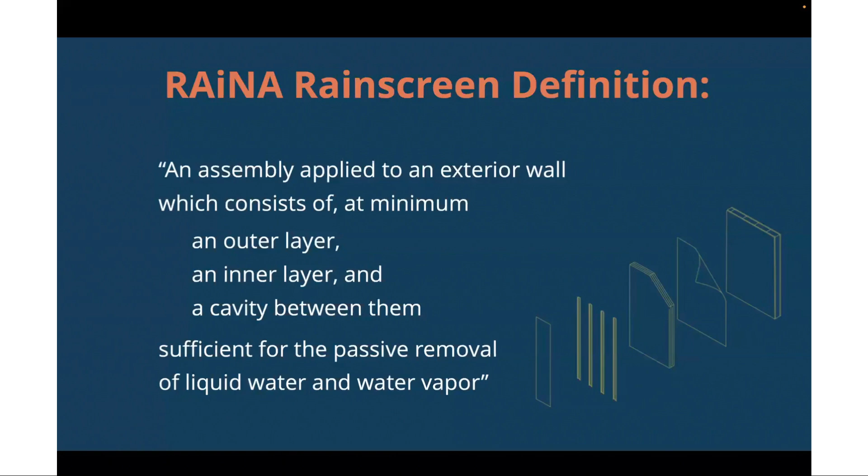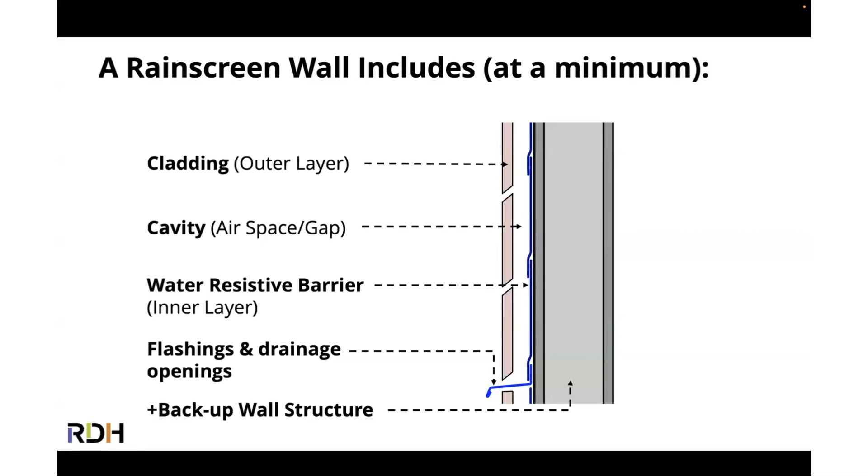Typically, this is what people would look at as a wall system: a Rainscreen wall would have that cladding as the outer layer, the airspace or gap or cavity behind the cladding, then there is a water resistive barrier, which would be the inner layer in this definition. Something that isn't always there, but in practice is almost always, is that you need flashings. You certainly need drainage openings. And this is all supported by a backup wall structure, whether that's cast in place concrete or wood studs or anything in between. So those are the basic minimum functional requirements.

But in a modern day, we also have insulation, particularly an increasing amount of insulation that's located outside of the structure to minimize thermal bridging.

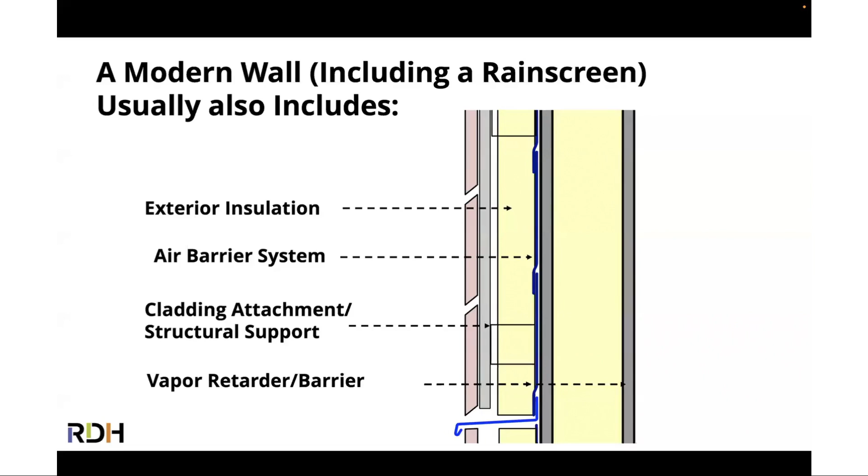We also have to worry about things like cladding attachment systems. This is a huge deal in terms of doing rain screens, a practical issue. And we also have an air barrier system here. For a rain screen as written, you don't need an air barrier, but we know for a modern wall, we need an air barrier and we need insulation. So that's why we're showing this as a more complete description.

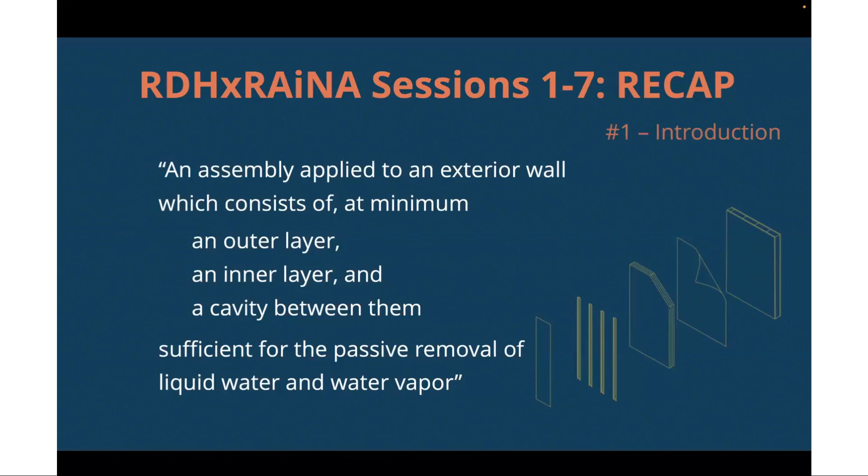Now, we have made this 8 sessions because we thought through the definition and thought, what pieces could we break down? So first, number one, Finch did an introduction: what are rain screens? Why do we use them? What are they good for?

Then I presented some of the history and its development, and it's actually quite significant how Europe, Japan, North America, and New Zealand went down different paths, and there remains confusion between these different parts of the world because of that different history and the different words and definitions.

But we started getting into the cavity, the parts of the rain screen wall, and focused on liquid water removal. So that means drainage, a whole one hour session on that. Then we looked at the passive removal of water vapor, where we can dry things out and make sure that condensation can be forestalled, and we do that by ventilation, which also needs a cavity. So that was a whole session, number 4.

Then we talked about the last line of defense in the Canadian Building Code, which is the water resistive barrier in the American building codes. So that was session number 5, all of the options and details.

Number 6 was cladding attachments, practically needed, but not here in this definition. Number 7 was the cladding itself, which is the first line of defense in the Canadian Building Code, and the thing that actually is usually the most expensive part of the entire enclosure. Even though people spend a lot of time trying to save money on insulation and WRBs, by far the most expensive thing is the cladding.

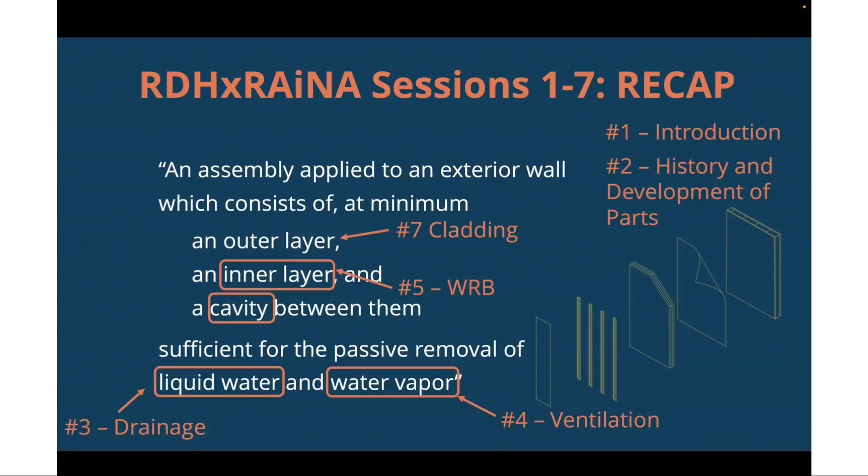Now, today, also not listed on this, we're going to talk about pressure equalization. So pressure equalization is not a fundamental requirement, meaning you don't have to have pressure equalization for a modern rain screen wall assembly to work.

Historically, we added pressure equalization as a feature or a component to essentially already functional rain screen systems that already had a cladding, a gap, a water resistive barrier, and flashings, and those are the walls that we added pressure equalization to. It's important to recognize that distinction, because sometimes the conversation about what it takes to make pressure equalization work doesn't remind you that you really need a water resistive barrier and flashings. And I'm reminding you of that, and you need to remind yourself of that.

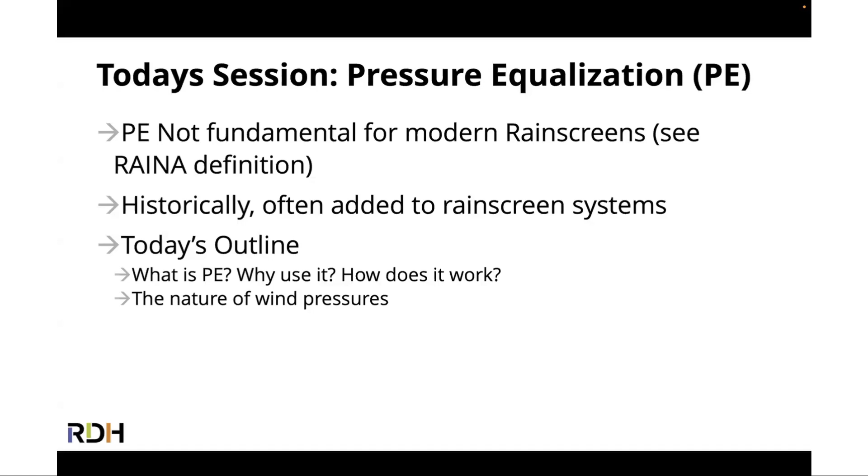So today I'm going to go through what is pressure equalization, how does it work, why would we use it, and then I'm going to dive into the nature of wind pressures, which is going to lead us into some interesting conclusions and observations. So let's talk about pressure equalized wall systems.

The intention behind pressure equalization, whether it applies to a joint between precast concrete panels, a window to sash joint, or a whole wall cladding, is that it's encouraging the equalization of the exterior wind pressure with the air pressure behind the cladding.

The image on the right-hand side is from one of the first guides presented in 1971 by AAMA, focused on curtain wall design. The basic idea was that if you just had a single layer that was your cladding and your water control, wind pressure would blow air up and over any cracks, joints, and openings.

So the concept shown in drawing C was to acknowledge that the cladding was not perfectly watertight, and therefore water was going to be blown through a hole. So they recommended complex joint details to resist the direct flow of water droplets, using labyrinths, gaps, and nice overlaps, but also to ensure an airtight wall so that wind would not blow through unintentional openings, dragging water with it.

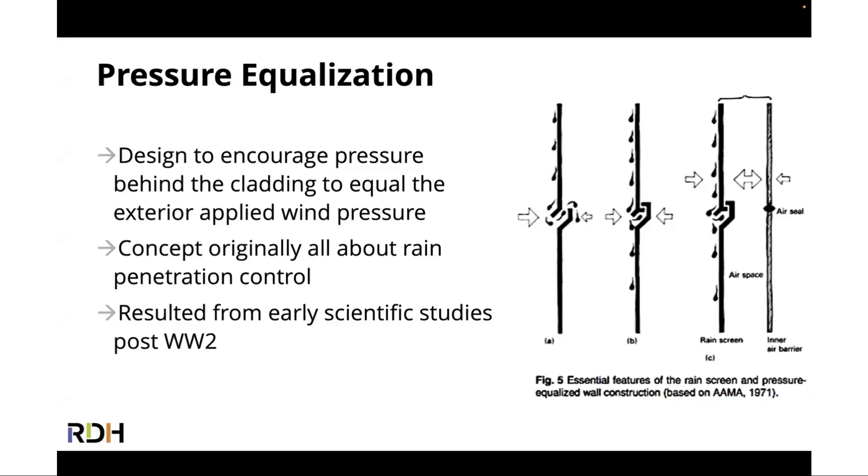And I think everyone understands gravity, right? You shouldn't tuck your pants into your boots, as I described. That actually remains, in my professional experience, the most common cause of water leakage in buildings. It is unintended inward sloping, or cracks and openings that slope inward, that bring water in.

Surface tension allows water to cling to surfaces, and that water running under the force of gravity can then, if the surface bends inward, drive water into your assembly. Again, pretty easy to design that problem out, but it occurs accidentally in many practical situations.

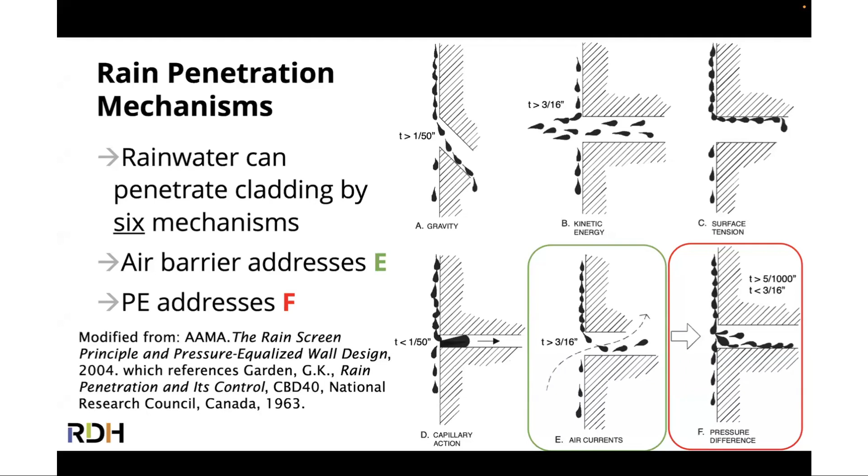Over a certain size of gap, a film of water can form, and when there is a higher pressure outdoors than behind the cladding, water could be pushed into the wall cavity or even further, depending on how the wall is designed. So again, the pressure equalization as a concept was being promoted, although not widely used, by the 1960s.

These are some old drawings. That's the reason that their clarity is so poor. And it was defining the cladding as a rain screen just to reinforce the fact that the cladding wasn't stopping water. So a rain screen cladding is really a cladding that leaks rainwater.

That's not hard to do. The hard part is the rest of that rain screen. Now, you can see here, by today's definitions, none of these walls would be seen as actually reasonable as a choice. So, for example, in the brick veneer over the wood framing on the far right, it shows the sheathing paper as an air barrier, not as a water control layer, not a water resistive barrier.

And you'll notice the flashing does not tuck behind the sheathing paper. And this is because they hadn't yet recognized how important drainage was, and hence how important weep holes and flashings were. And so they were really pushing the idea that these weep holes were ventilating openings, and that the sheathing paper, the WRB, was an air barrier, and that was the way to get good rainwater control.

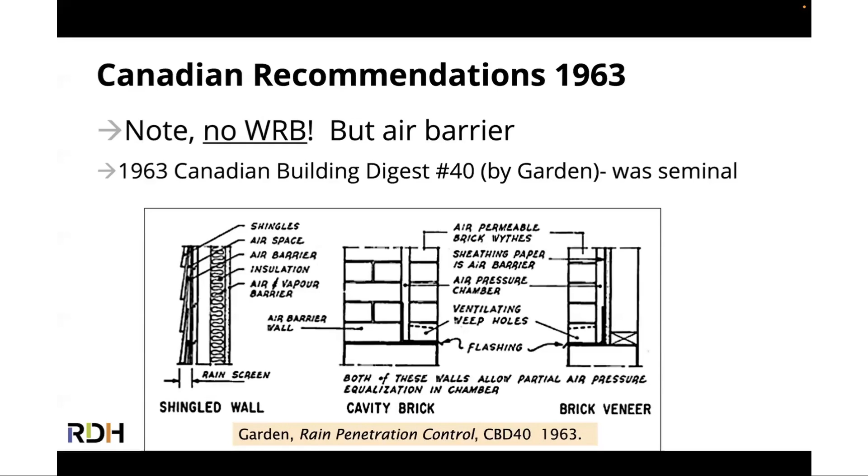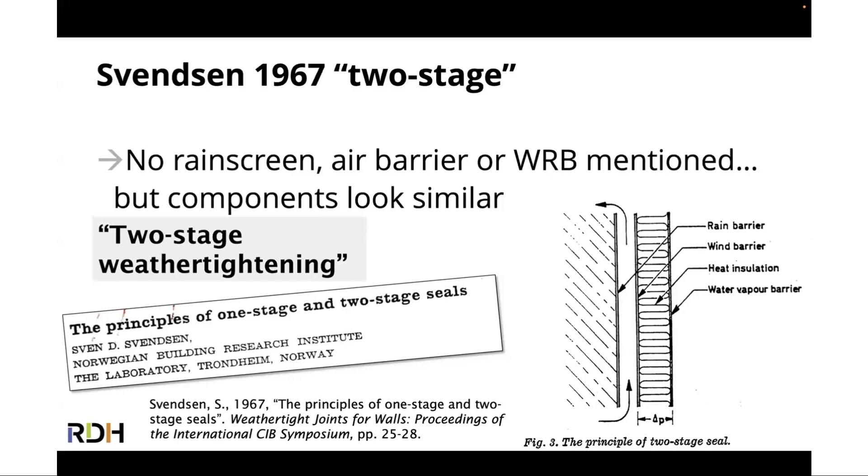So this is another image from another very important document, Garden 63, Svendsen 67, very important seminal documents that started us down this road. But we didn't really have an air barrier as a language or a water resistive barrier. We didn't really have that clearly stated, as I would say we have in the last 20 years.

So this slide is just reminding you of what I said. Air barriers were not standard. Water resistive barriers were not a thing. But today, when we interpret how we should move forward, we have to recognize that rain screen walls, what we talked about in the previous 7 sessions, absolutely have a water resistive barrier that is water resistive.

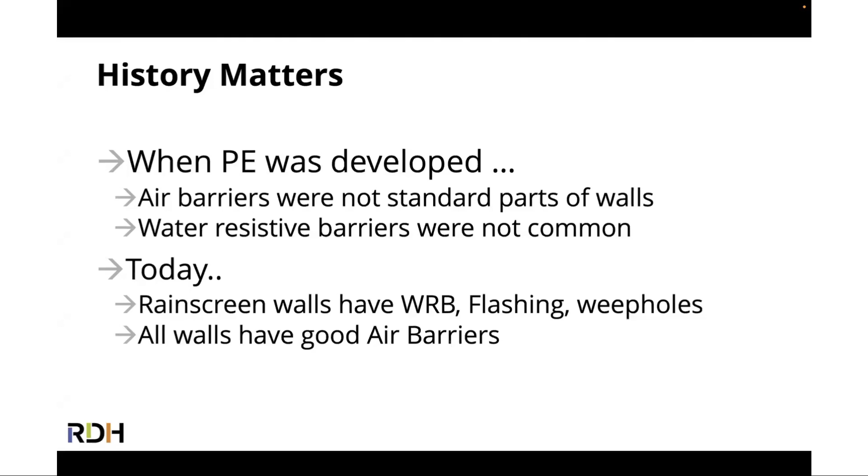It's integrated properly with flashings, which connect to weep holes to get the water to the outside. That's rain screens. Also, modern walls have great air barriers. We're increasingly testing our buildings to make sure that our air barriers are good. So those things are now inherently part of accepted minimum practice, not even best practice.

So pressure equalization adds a component to this. It says we want to manage air pressures across the rain screen, across the cladding, to reduce the amount of water that will pass because of air pressure differences. Remember, all the water leakage that previously occurs with no air pressure differences still occurs. Pressure equalization deals with that wind pressure difference as a force.

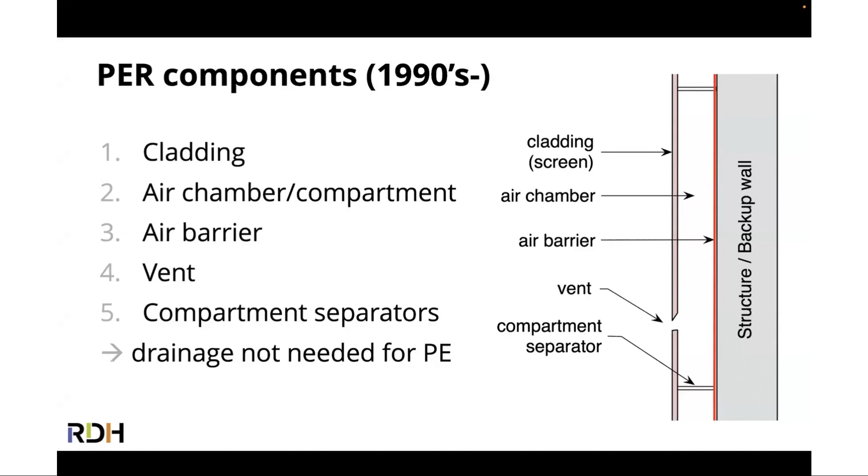So the 5 components identified back in the 90s were a cladding, an air chamber - it's no longer just a gap, because it has these compartment separators, which we'll come to at the end of this session, about limiting the spatial size of the air gap. There's an air barrier and there's a vent. I intentionally didn't show you a water barrier, flashings, integrated, because that's not what pressure equalization is about. That's what rain screens are about. But a pressure equalized rain screen pushes all these things together to get the best in performance.

So the theory here is that we're looking at the bottom of a wall. The blue line is your air barrier. The wind pressure is rising or falling or blowing hard on the left-hand side. And that's the green box to say that when the wind blows on the outside, it enters via the vents into this chamber. And so now the pressure on the inside is the same as the outside.

Ergo, no pressure across the cladding. And that means that if there was a crack or opening across the cladding that would have allowed air pressure differences to push water in, then it would no longer work. So it would not drive water anymore. If you have a downward sloping crack, however, gravity will still drive the water in.

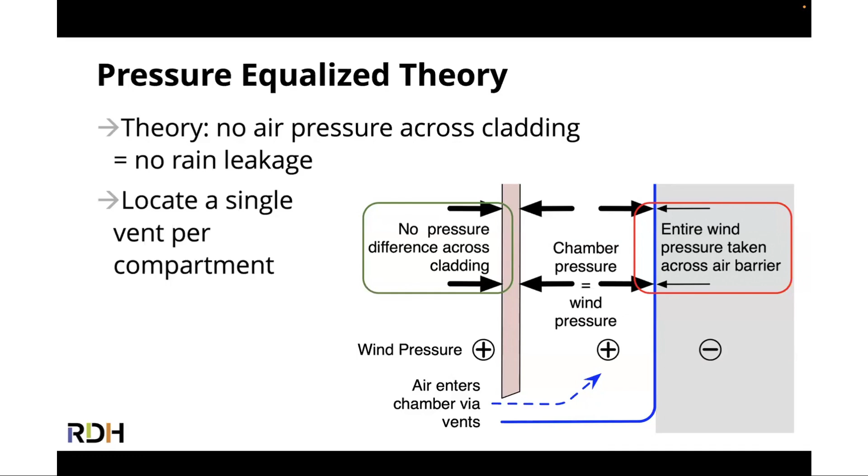So this is all about solving this air pressure difference. Let's start with thinking about pressure equalization in a static sense, and then we'll talk about dynamic, and then I'll talk about spatial dynamics.

So static pressure equalization is thinking about the wind as a constant, steady pressure. And by steady, I mean steady over 10 or 30 seconds or something. So you apply a pressure. Let's say it's 20-mile-per-hour wind hitting the face of your cladding.

That turns into a pressure of some 100 and some pascals, or I don't know, a quarter-inch water column, something like this. That uniform pressure will easily flow into the chamber and absolutely get close to equalizing across the cladding. The reason I mention it this way is that that's not how the wind is in real life, but it is how we do most water penetration tests. A uniform, steady pressure means that all you need is a good air barrier and even a small vent, and you will get equalization.

Because within 10, 20 seconds, even through a small vent, air will flow from outdoors into the chamber, equalizing the pressure across the cladding. And so if you were to measure the pressure at many spots across your wall system, it would follow the green dashed line on the right-hand side, showing that there's the same pressure on the outside as in the chamber, and it only drops across the air barrier. And that's how we do most on-site tests.

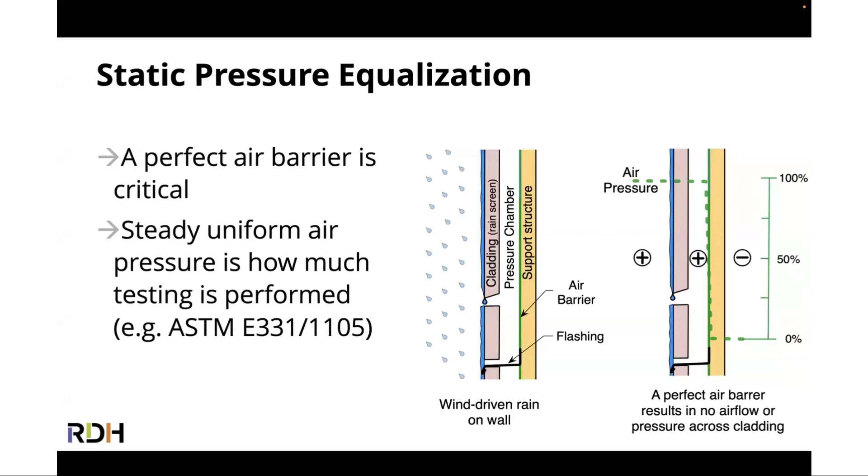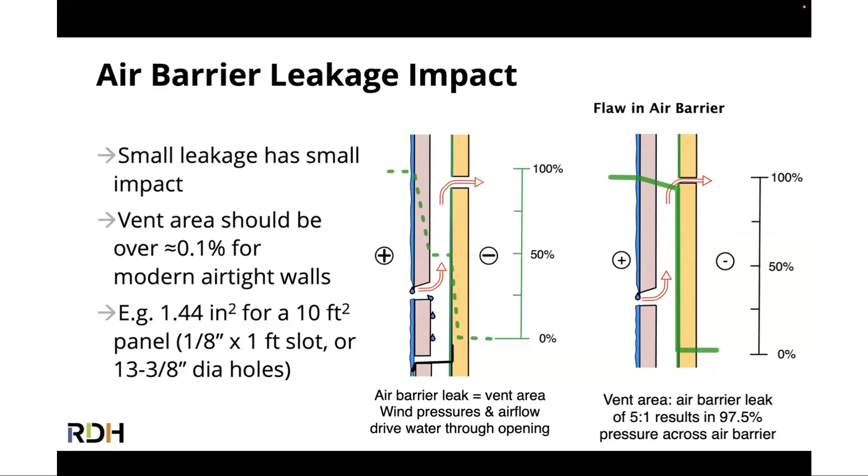Oh no, it's not conservative at all. It's the opposite of conservative. Because those steady uniform pressures are actually easy to pressure equalize. So the moment you have even a modest attempt at venting and air tightness, all systems are pressure equalized. And that's very common, like window tests - we do 15-minute window tests, and as long as you have a reasonable attempt at venting the frame, they're all pressure equalized. But that doesn't mean that they all work that well, as we'll find out in the field.

However, I want to point out that I find it surprising as I look at modern systems - this is an ACM cladding system, and the vent openings for these panels are 5/8 of an inch by 1/8 of an inch. This is barely enough to let water out. And the area is probably well less than 1/10 of what's needed to get close to air pressure equalization at a reasonable level. So this is a bit surprising, but it's not uncommon.

So larger openings, more openings, or even slots are usually easy steps forward to achieve this steady pressure equalization.

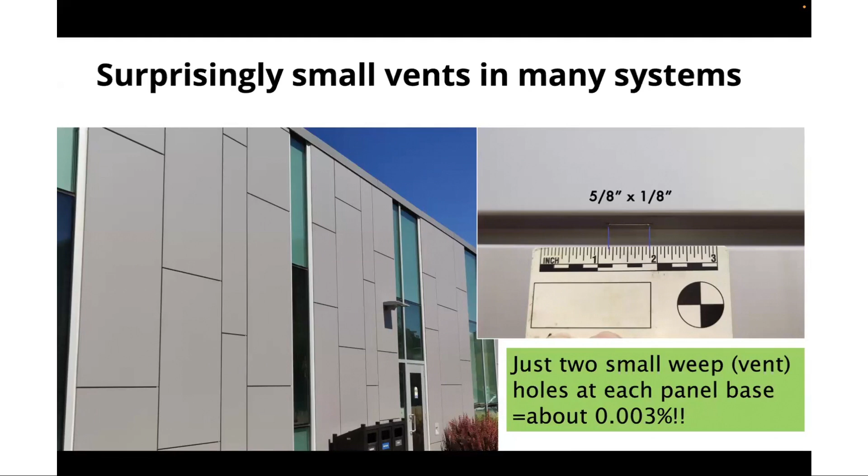So these are highly vented systems - we talked about these in the last session. If you have this many vents in your cladding, you can be pretty darn sure that the air pressure behind the cladding is equal to the air pressure on the outside of the cladding. However, you can also be pretty darn sure that lots of rainwater will directly pass through the cladding. So there's always a little bit of that trade-off.

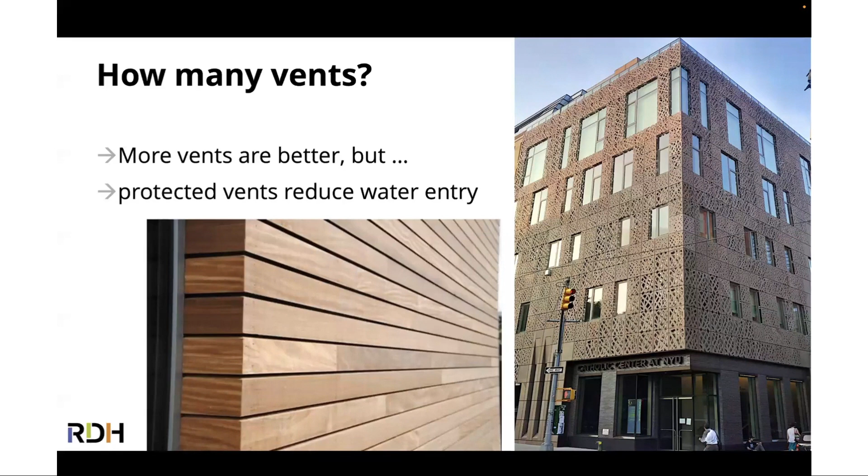The historic pressure equalization rain screens were all about protected vent openings. But that doesn't mean that these systems I'm showing on the screen can't be quite successful. It just means that they are not successful because they're pressure equalized. They're pressure equalized for much of the time, and yet lots and lots of water passes through. So you have to figure out how to manage that high level of water passing through.

So I want the key takeaway from this chunk to be that walls with good air barriers are almost all pressure equalized to static pressures with even modest vent areas. So, reasonable vent areas, good air barriers, and when you do a steady test as per most standards, it's going to work as a pressure equalization.

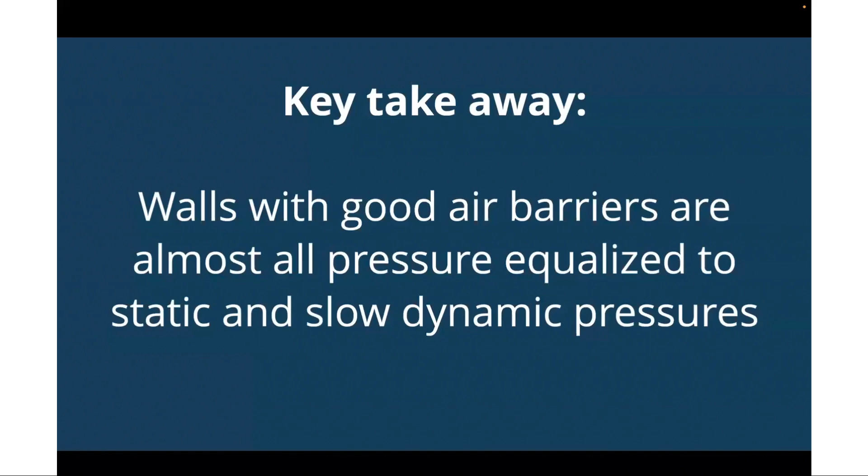So let's get a little deeper into this. First of all, the concept that we're pressure equalizing to manage water penetration through the cladding - you can't forget that water penetration through the cladding is likely to occur anyway. Even at zero air pressure difference across the cladding, there are those other mechanisms, surface tension and gravity being key, that can drag water in. I've shown a crack in this cladding that happens to angle downward, which means that it doesn't matter how pressure equalized you are, water will leak in.

And that's why rainscreen systems say, yes, and I have a cavity, I have a water resistive barrier integrated with flashings and a weep hole, and that leak is not a problem. So that's how we would normally approach a rainscreen wall.

Now, another thing to keep in mind is that leaks that occur not in the cladding itself, but at penetrations like canopy attachments, window and door penetrations, balcony penetrations, routinely have water ending up on the water resistive barrier. You might think that's not a problem, and I agree that water on a water resistive barrier isn't a problem. However, if I have pressure equalized systems, as I show on the right-hand side, now 100% of the wind pressure acting across the enclosure is acting on the water resistive barrier, which now has water on it.

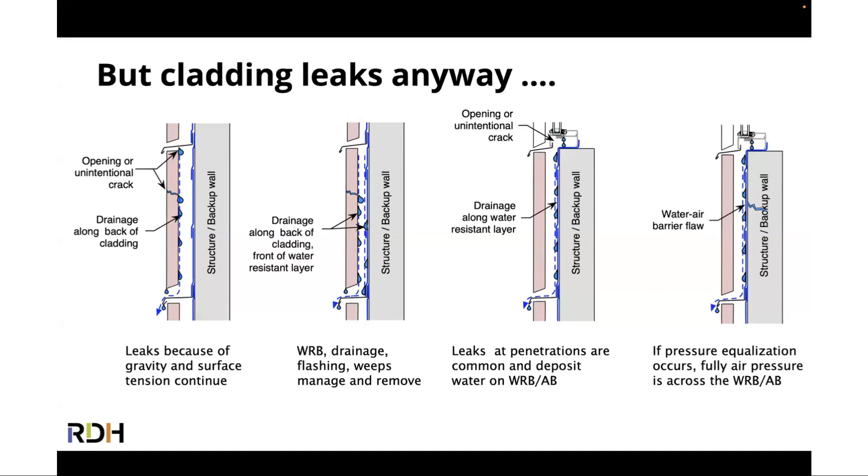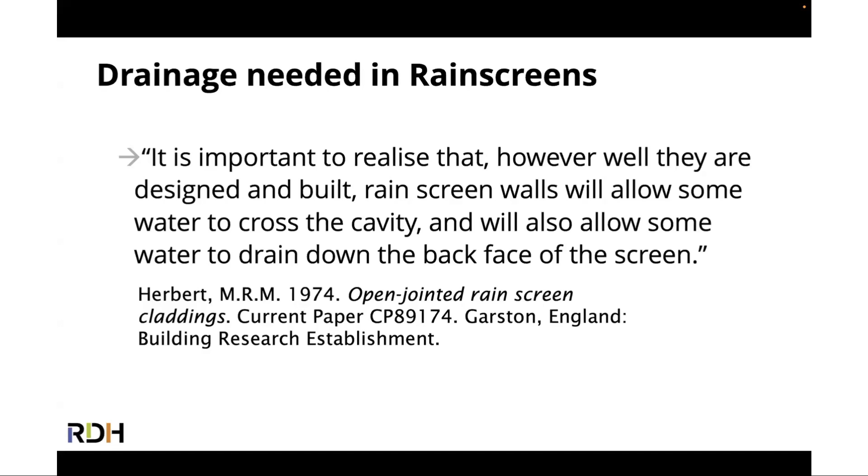I want to say that it was pretty clear within 10 years of Garden's seminal paper on rainscreens that it was understood that rainscreen walls will allow water to cross the cavity and also allow water to drain down the back face of the screen. And clearly, Michael Lacasse, Dr. Lacasse at the National Research Council, did a whole bunch of much more detailed studies in the late 90s that led to the same conclusion, which led to the Canadian Building Code requirement of a second line of defense, aka the water resistant barrier.

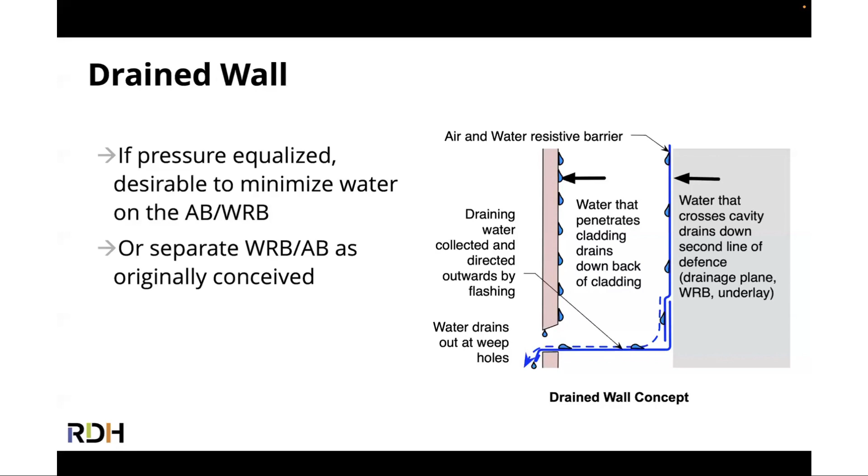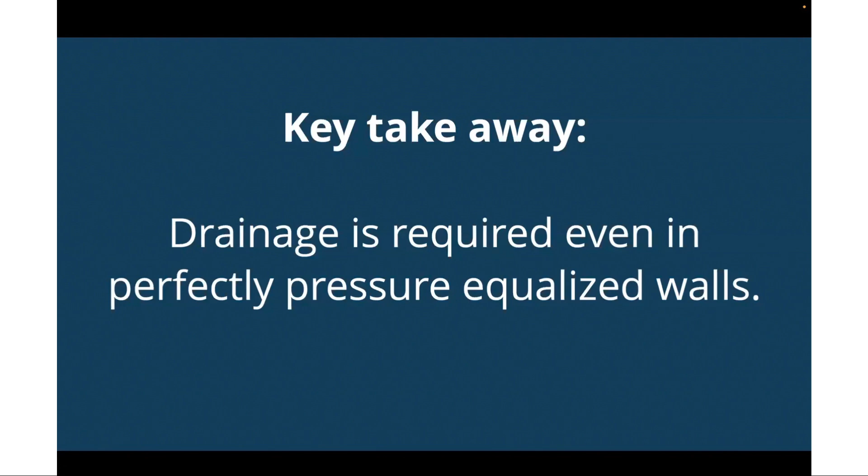So if I have this detail as a drained wall system, a rain screen, pressure equalization helps reduce the amount of water that passes the cladding, but any water that does pass through, I'm ready for it, I can manage it. Pressure equalization is an enhancement that reduces the amount of water across the cladding, but it doesn't change the need for a water resistant barrier, flashings, and weeps. That's why the key thing is drainage is required even in perfect pressure equalized walls, which are hard to find. But even if we did achieve perfect pressure equalization, we would still want drainage to be there.

To understand more, we're going to take a segue into the nature of the wind. This tower here is not a cell phone tower, it's actually a research facility. It's a 200-foot tall tower in the middle of a rural region in Iowa, which means their buildings are spaced every mile apart, and the flat nature of the terrain means you get really good wind conditions here. This is called an atmospheric observatory. It's not just wind speed, they measure all kinds of things as you go up this tower.

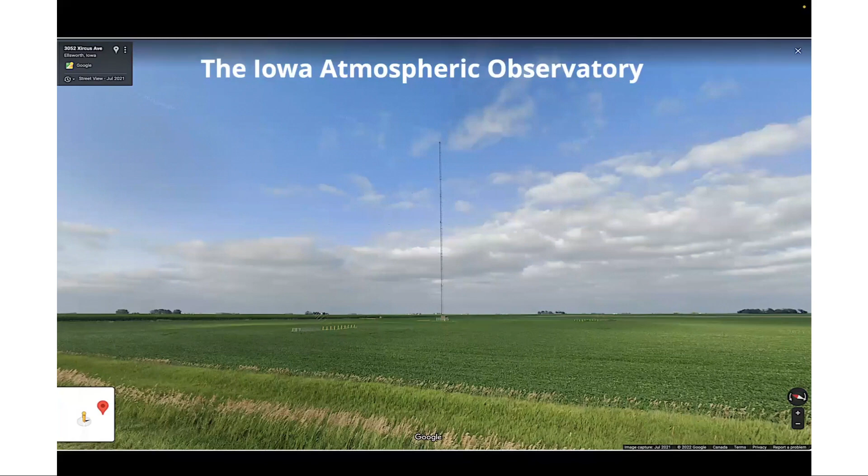I'm going to show you some of the results from wind measurements to give you a feeling of what wind looks like. I chose this day because during that day and time, the wind conditions were seen as extremely high. Tractor trailers were being knocked over on the nearby interstate, that kind of thing. And yet the pressures are actually quite a bit lower than we would normally impose on a normal water penetration test. So just take a look.

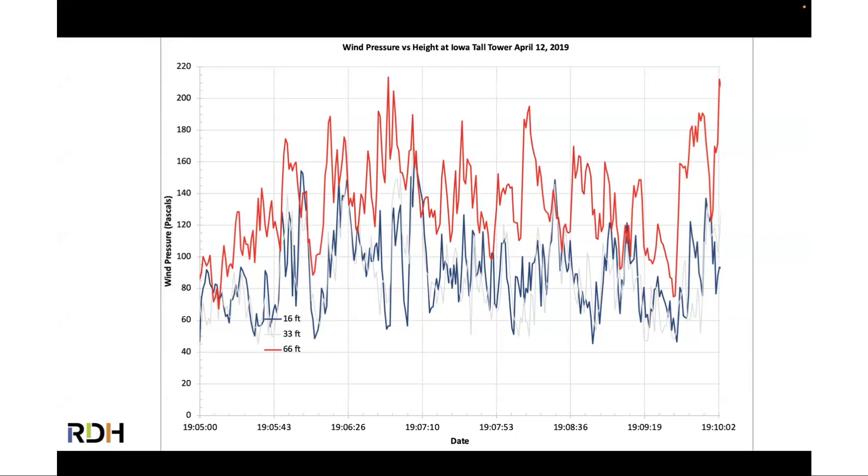There's a few things to notice here. I've got actually 3 traces, this is over approximately 5 minutes and 2 seconds. You'll see that the red line is 66 feet above ground, so what is that, 5 stories up, 6 stories up. The blue line is 16 feet above ground, so that's like 2 stories up. A couple things: one, as you go higher up, the pressures get larger, that's kind of a given. But more important, I want you to notice that over this 5-minute period, pressures vary quite significantly. They vary rapidly, and I haven't even included direction here because it's more stable.

So let's just focus on this wind pressure at 66 feet above ground. We start at 100 pascals, which is about 1/3 of an inch of water column. By the time we get to 7 minutes after 7 p.m., we're up to 200 pascals, which is 3/4 of an inch of water column. Then it drops and rises and drops. The average pressure here is only 138 pascals. That 138 pascals is, by the way, a default value for ASTM E331, which no one uses. Nowadays we typically use a minimum of 300 pascals. But the 5-minute average doesn't actually capture how much the air pressure varies in time. Here's a couple of the gusts I've looked at here.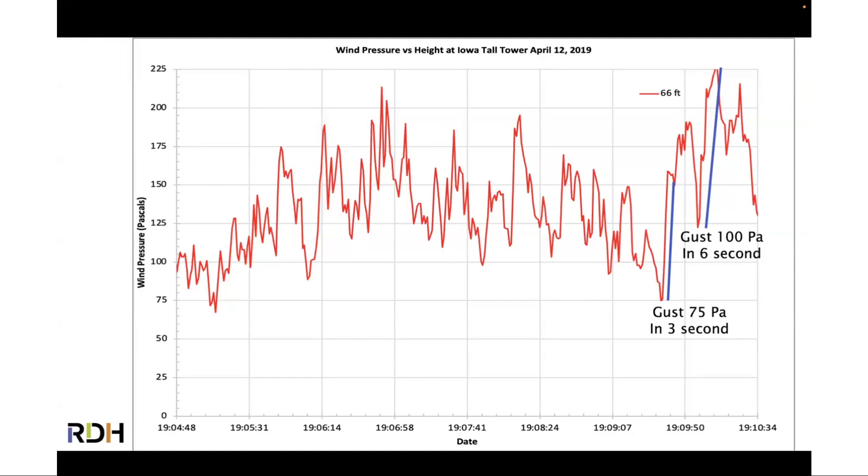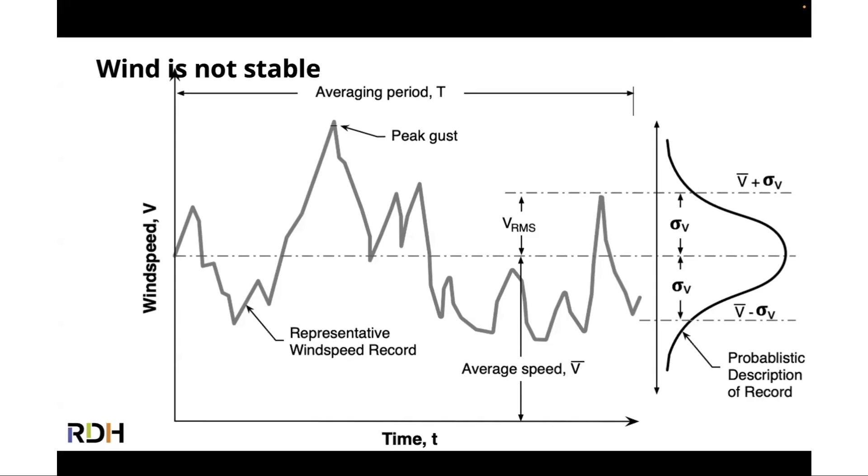And so we use statistics to measure it. We average wind speed, usually over an hour. We talk about peak gust loads. That's what structural engineers use to design the cladding attachment systems and the support structures. And we also have something called the root mean squared, meaning how the standard deviation varies.

How gusty is it? So all of this data is available. But what matters to our discussion about pressure equalization is that this highly bouncing around wind signal is acting at the vents to the air chamber. And now we have to have air flow into and out of the chamber on a second by second basis, not over multiple seconds or minutes like in an ASTM E331 test.

No, this has to happen in seconds. And so not a huge amount of air has to move in if you've got a good air barrier, but some air has to move in. And that means the pressure behind the cladding always lags behind. It's sometimes higher in the chamber than outdoors, and sometimes lower in the chamber than outdoors.

Because the size of the chamber affects how much air has to move in to equalize, big deep chambers require more airflow, and so they don't respond as quickly. So we normally trade off. If you have a 4-inch chamber, you might want more vent area than if you only have a 1/2-inch air chamber. This is also why joinery in windows and curtain walls has much less challenge with equalization to these dynamic pressures, because the volume served by a vent is much less. So they respond more quickly. But you have usually a few seconds to respond.

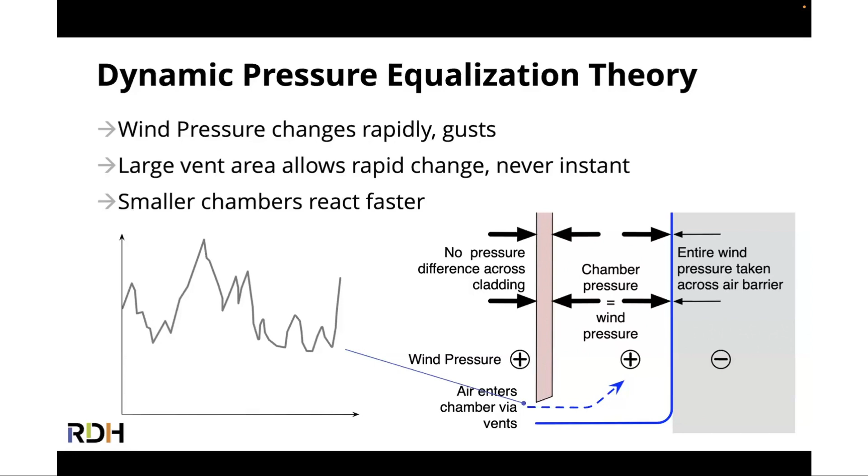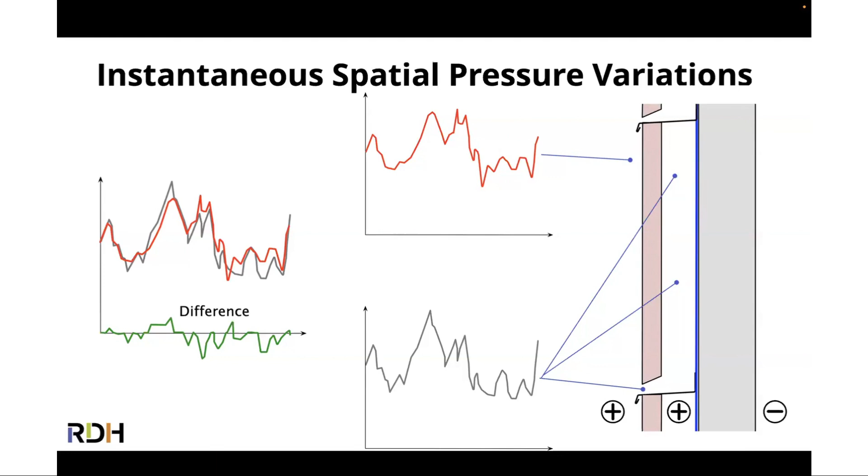That's shown by the green line. And so even if I were able to be perfectly equalized, these spatial pressure variations limit how good I can be. I can have a perfect air barrier and good vent openings, good size, but the nature of the wind is such that because it varies spatially, I can't have a chamber that is served by vents that are too far away. I'll show you some images here.

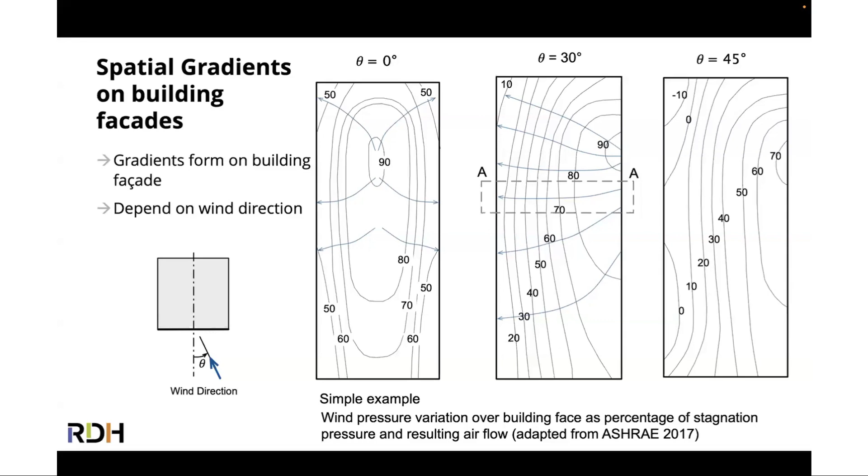And so when I'm looking at where my vent openings are, the chamber only responds to where the vent opening is. As soon as I go onto a bit of an angle - I'm showing you 30 degrees here as a reasonable wind angle - I get really significant gradients of pressure across the facade. And so even though my wall with its vent openings could respond perfectly to a static pressure, and really quite well to a dynamic pressure, when the wind pressure varies over the face of the building, which it always does, now the assembly can't respond as well.

And we can aim for better performance. We will try and break up our air chambers into modest sizes. And that's why the terminology 'air chamber' came into being for pressure equalization, as distinct from air gap or drainage gap, because this chamber has a limited spatial extent.

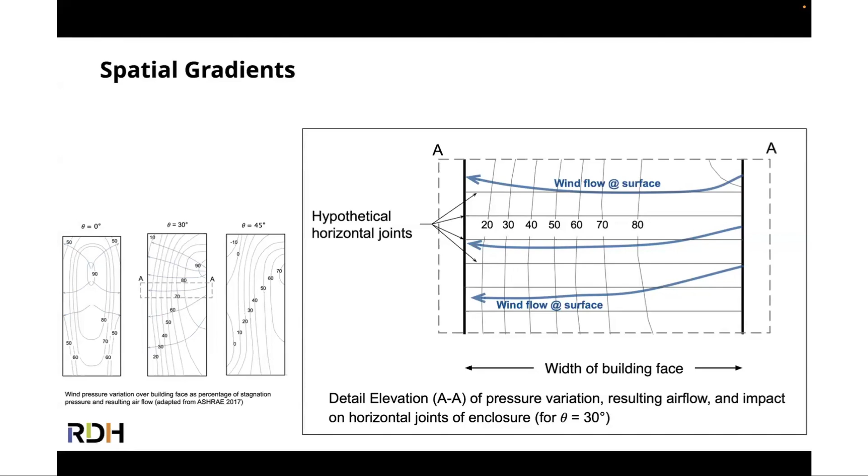I'm using high-tech language here because that way I can charge more money. The limited spatial extent of the chamber is important to manage how much unequal pressure I get because of the nature of the wind — nothing to do with what I did with my wall design. So I compartmentalize my wall system to create chambers.

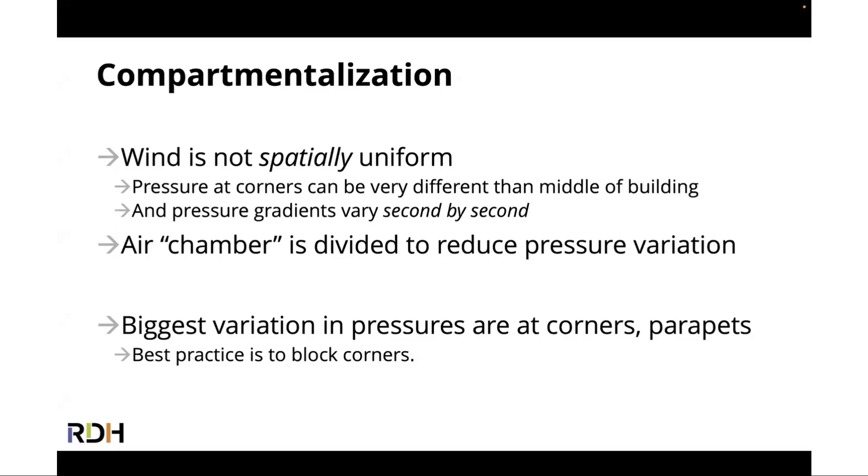Vertical compartmentalization is commonly provided in practical wall systems today because we'll have flashings and fire stops at floor levels, so there's natural compartmentalization vertically. Horizontally, in plan section, we don't usually have as many good reasons to put in compartments, so we have to be a little bit more intentional about that.

This is a very common pressure condition, and it is relatively easy to block a cavity at corners by some means. Sometimes I've seen it done even with backer rods — if you have a 2-inch backer rod and you shove it in the corner, I've seen that for brick walls. We've also seen sheet metal being used. It doesn't have to be perfectly airtight; it just has to be a lot more tight than the vent openings that bring air into the air chamber.

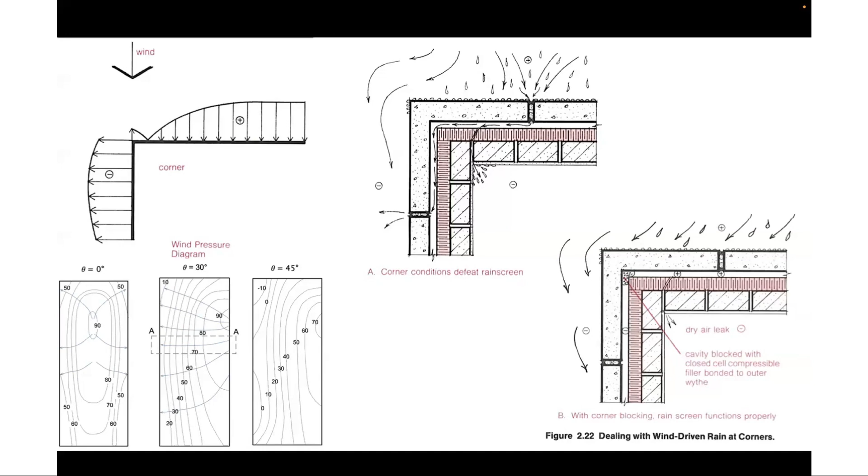It certainly will improve pressure equalization performance under real world conditions. I'll point out, however, that both of these systems will perform exactly the same in a laboratory test, because a laboratory test does not include spatial variations. So you will see no difference in performance between these two systems, whether they're compartmentalized or not. That's why it's so important to understand what's actually happening, so that you don't get too carried away with what the tests tell you and how you design.

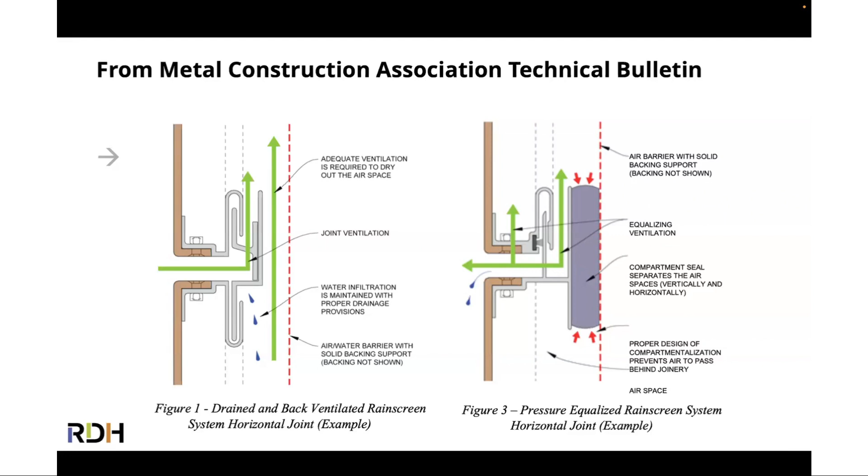What size should the compartments be? Heck, I don't know — that's sort of the answer that science has come up with. The best research that I know of dates from 1996. This was their draft recommendation at the time, based on some pretty serious wind tunnel tests, limiting these sizes based on a goal of 75% equalization — not 90%, just 75%.

When they were describing it, it was based on a fraction of the width of the building. So the horizontal size was — if you're near the tops and edges of the buildings, the compartment should be no bigger than 1 meter. Actually, near the middle of the building, the compartment should be no larger than 1 meter, which in a way makes it kind of impractical. These numbers came out of their analysis, and there's lots more research that could be done, but realistically, these are saying 1 meter is what you should be choosing. And that's pretty darn small.

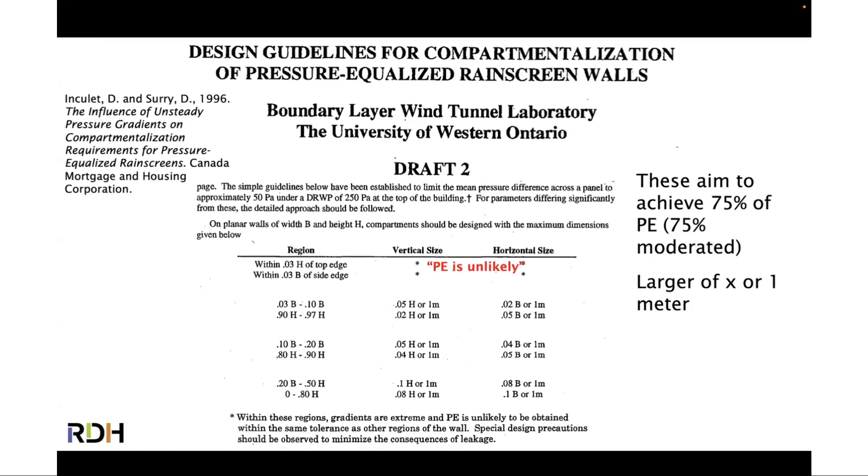When we measure in the field — and I'm getting near the end here — there are not a lot of field measurements. I could do an hour on field measurements of pressure equalization, but there's not a lot of them. This is one of the best ones, again from the National Research Council of Canada. This was on a high-rise building in downtown Montreal, 30 stories or so high.

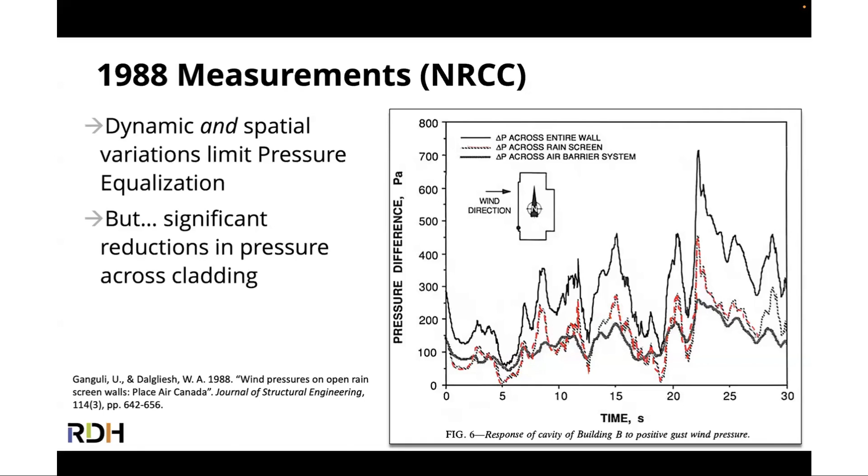The panels that made up the wall were precast concrete, pressure equalized, with exceptional air tightness and well-designed vent openings. The red line here shows actual measurements of the pressure across the cladding during a relatively windy period. It's definitely a taller building, but these are significant air pressures. You can see that it's probably only about 50% pressure equalized, and yet it followed all of the best practice rules of the time. This just opened people's eyes as to how important spatial variations were and how difficult it was to get perfect equalization.

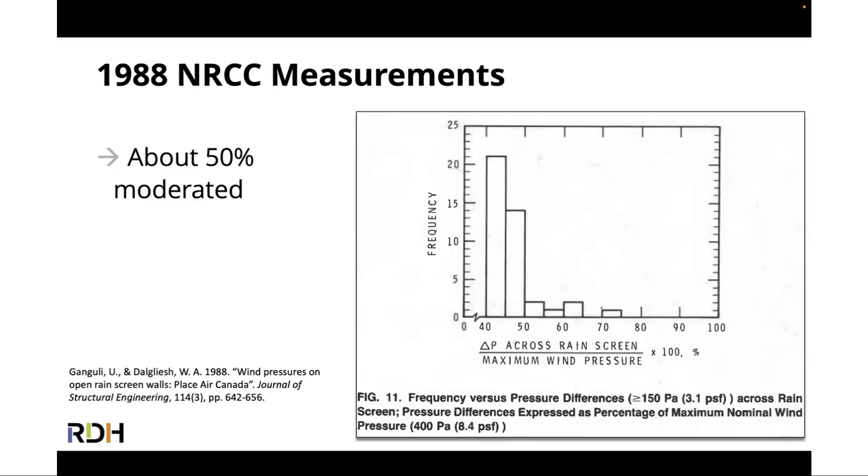So this is another way of presenting the results, meaning they just looked at the number of seconds when the pressure difference across the cladding was 40 or 50% of the total pressure. And as you can see, almost half the time, 40 to 50% of the total pressure was across the cladding in a pretty well-designed system.

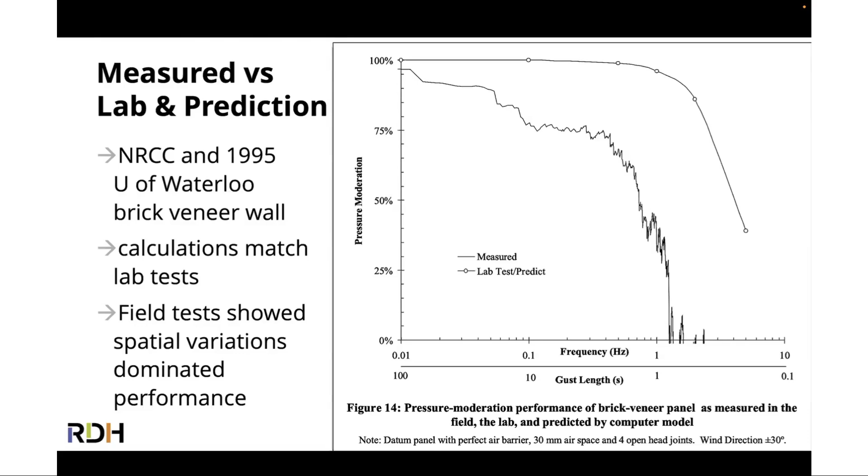As long as the gusts were longer than about 1 second in duration, we were in the 90s - it was great. However, in the field, the pressure equalization performance shows a jagged line that is significantly less. By the time we got to gusts that were only 1 or 2 seconds long, we were under 50% equalization. That was based on physical measurements, all about the spatial characteristics of the wind, because it should have performed as per the solid line, except the solid line was all uniform pressures, some of them dynamic - but that wasn't the hard part. It was the spatial characteristics that really hurt us.

So the takeaway here is the nature of wind pressures will often limit performance more than system design. If you follow good practice, you will have good pressure equalization performance in the lab, and the limit in real life is the nature of the wind pressure that's acting on the system.

John, a couple questions here before you jump onto this next section. Is there any way that we'll get to a point where we can maybe recreate the real world conditions in laboratory conditions specifically? Are we heading down a path to get closer to that? Because it seems like maybe we're okay.

It's already been done - all you need is lots of money. They have developed really sophisticated actuators where you can put an individual actuator over each vent opening and run it through a realistic pressure signal measured from the field, and that will work. It has been shown in university level research. But the problem is you're going to spend $50,000 on a test, and it doesn't actually tell you that much, other than you should spread the vents out across the facade, make it uniform, use compartment separators, and despite all of that, you're going to use a water resistive barrier with flashings and weep holes. And if you do all of that, what do you need to test for?

So, one more question on that - there's a handful of questions that kind of tie back to that previous slide. When it comes to system design maybe not being as impactful as the wind pressure and how it limits performance, how might we consider material selection or system design when it comes to things like the thickness of the cladding being used, things that are maybe going to inhibit some airflow, like a bug screen, additional insulation in the cavity? How are those items going to impact the potential performance of the pressure equalization?

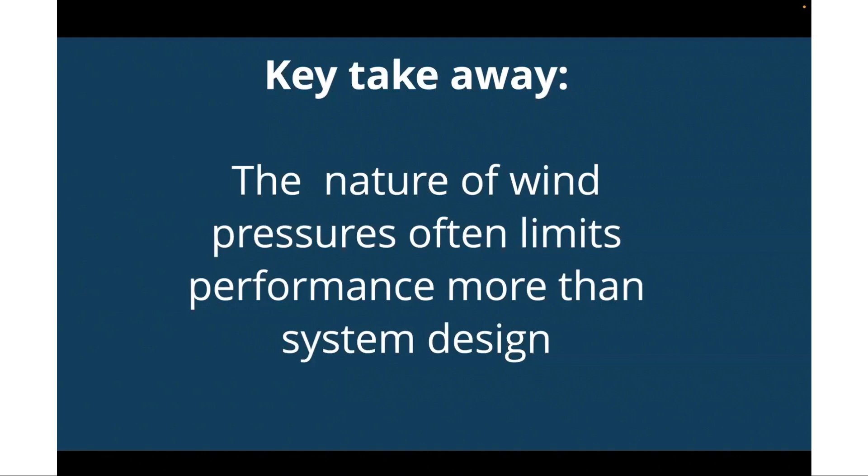The thing that isn't well answered is how much should I compartmentalize and where should I put my vent openings? You do want to distribute your vents across your compartment. It was originally deemed that you should just put the vent at the bottom, but actually some of that wind tunnel work is showing that you're better off having vents left, right, top, bottom, so that the air chamber sees a spatial average of air pressures. But compartmentalization is an unanswered question. Certainly corners, certainly ideally near parapets, but there's not a good answer to that.

I've mentioned some of this already, but again I want to reinforce that most of the current standards are spatially uniform pressures, and almost every window out there is tested under spatially uniform pressures. It doesn't actually capture any of the pressure equalization performance really at all, other than that air tightness thing.

But there are dynamic test standards. In Europe they have the EN 12865, and it's not really a dynamic test. It takes the pressure, rises to a high pressure, holds it for a few seconds, falls. So it captures a little bit of it, but not a lot. A 15-second cycle time is pretty easy for almost everything to meet.

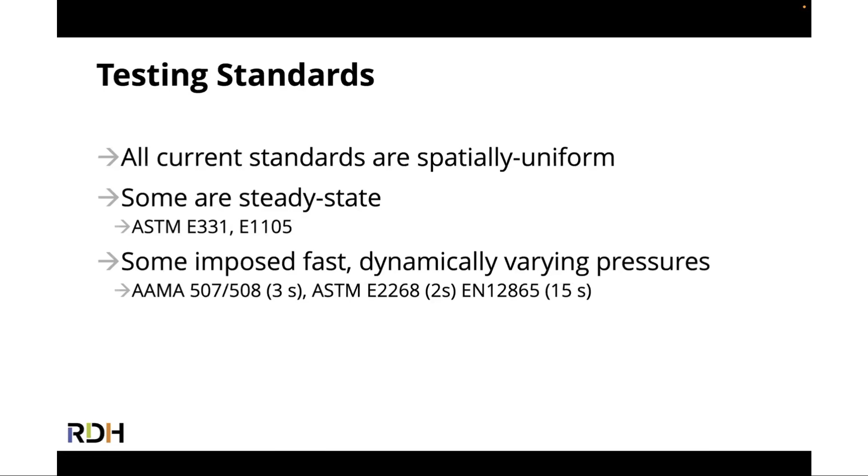The ASTM 2268 actually specifies a 2-second cycle time. That's challenging, and that means you are asking a fair bit of it. I believe, I wasn't involved, that is why the AAMA 508 test standard used a 3-second time, because 3 seconds is already pretty challenging. Now that gives us a dynamic response as well, but it doesn't give us a spatially varying response.

So we try and impose something like a triangle or sine wave. Oftentimes the pressure only drops down to some small positive number. We don't let it go to zero so that it's always blowing in, because in real life that's how it works. The pressure in the chamber will closely follow with some delay and some small reduction in peak. But in most cases, as long as you have a reasonable amount of vent area, you'll end up with good pressure equalization in this test.

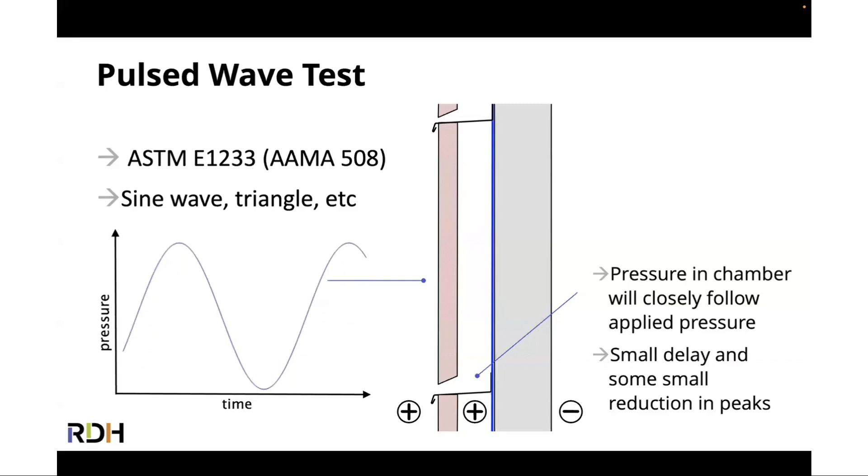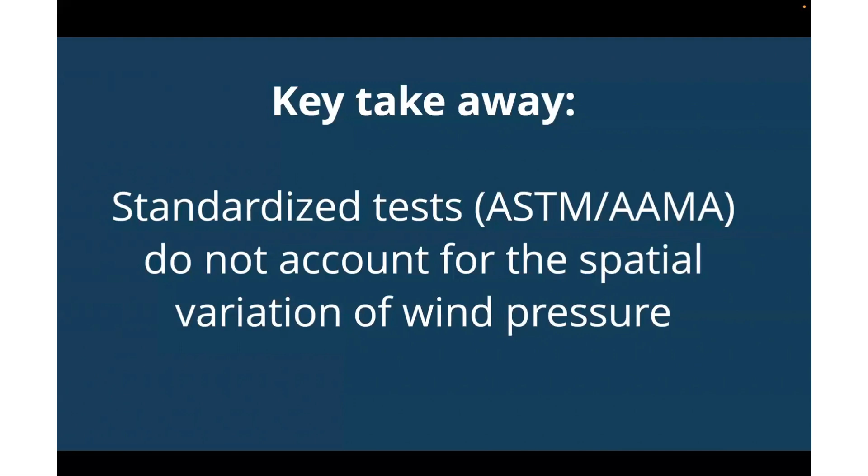That means you'll often get pressure equalization in the field, but you should accept that a lot of time you'll only get 50%, and you should be aware of that. The key takeaway is that all standardized tests do not account for the spatial variation of the wind, and that can dominate large panels, large meaning 4 or 8 feet in size. It's another reason why joints do far better, because they tend to be spatially more restrictive.

I want to answer that question about cladding thickness in a moment. But my recommendation, and I will grant this could easily be argued about, is to focus on effective water resistive barriers, drainage, venting, and air barriers, as that's your baseline. That's what you've got to do.

Pressure equalization usually does add some performance to rainscreen walls. In many types of systems it adds very little performance - systems that have lots of openings in them anyway, such as brick veneers. They leak like crazy whether or not they're pressure equalized. Metal panels probably have the most benefit because they don't leak at all, except at those joints and cracks, so they can have some significant benefits from pressure equalization.

Ensure large vent areas - I'm adding this as a special point because frankly that's probably the one thing you can easily do that will enhance performance without getting lost in the weeds about exactly how big, how much, and how it's going to depend. With respect to the question about cladding, I started this seminar quite deliberately saying the focus was on managing rainwater penetration.

But there's no doubt there are people interested in saying, hey, if the pressure across the cladding is less, doesn't that mean I can make my cladding attachments lighter? Doesn't it mean I can use thinner metal with less bracing and not get wind buckling and so on? Okay, there's a big difference between rain penetration concerns and these types of structural concerns.

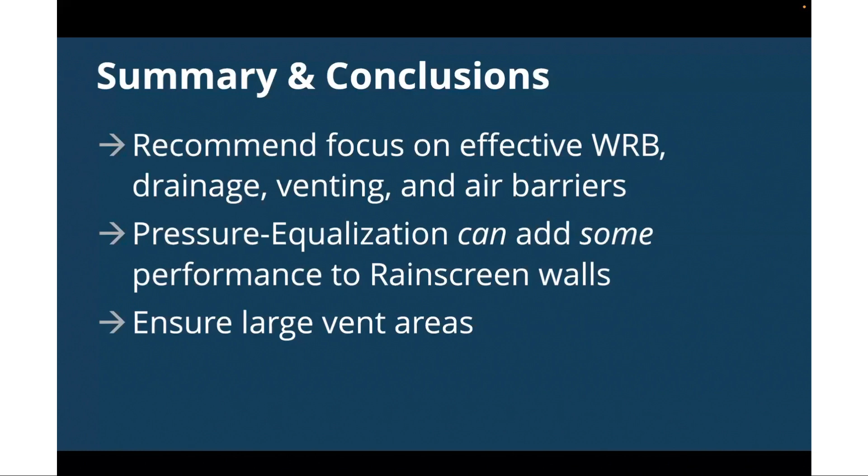Sorry, long question. So I'll leave it there and we'll get right into the questions and so on, although we've already touched on a bit of that.